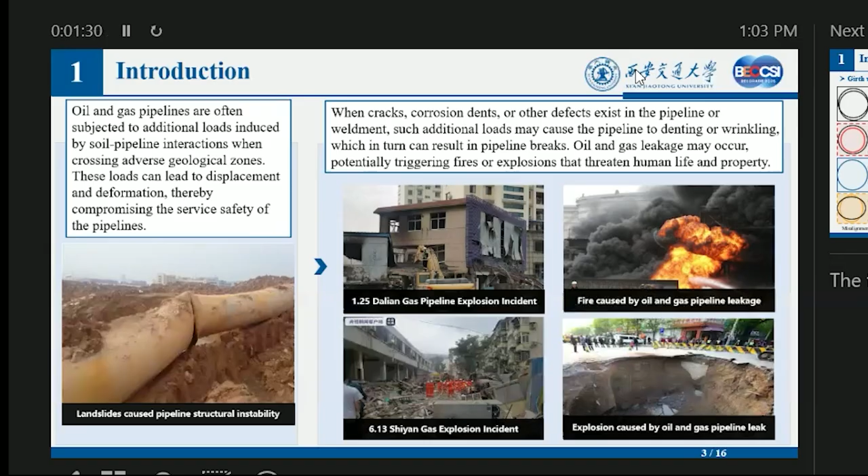Oil and gas pipelines are often subjected to additional loads induced by soil-pipeline interactions when crossing adverse geological zones. This load can lead to displacement and deformation, thereby compromising the service safety of the pipelines. When cracks, corrosion, dents, or other defects exist in the pipeline or weldments, such additional load may cause the pipeline to denting or wrinkling, which in turn can result in pipeline breaks. Oil and gas leakage may occur, potentially triggering fires or explosions that threaten human life and property.

Girth welding is a common technique used for joining pipeline segments. However, various misalignment types often occur at the girth weldment, such as offset misalignment, unequal diameter misalignment, unequal thickness misalignment, and ovality misalignment. These imperfections make the girth weld become a weak region, where fracture or buckling is more likely to initiate.

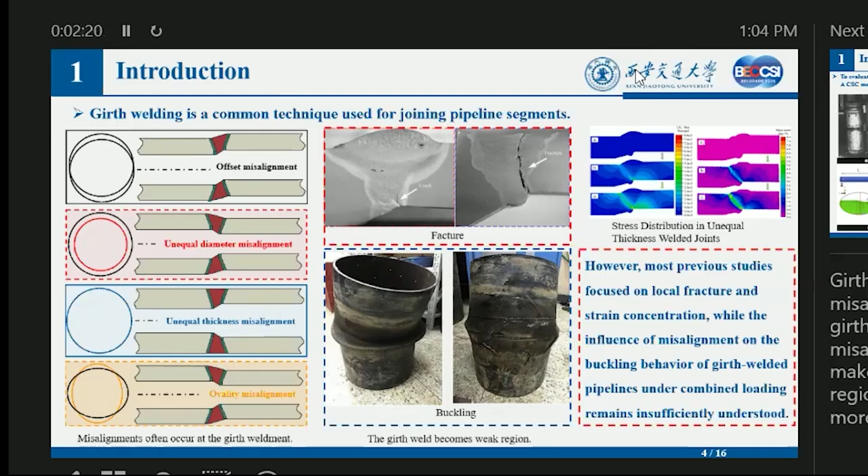However, most previous studies focused on local fracture and strain concentration, while the influence of misalignment on the buckling behavior of girth-welded pipelines under combined loading remains insufficiently understood. To evaluate buckling behavior of pipelines, researchers have conducted a series of experimental and numerical studies. A CSC model is proposed to account for the effects of geometric features, loading conditions, and material properties. Existing CSC models include CSA, DNV, the Dorey model, and the CRES model.

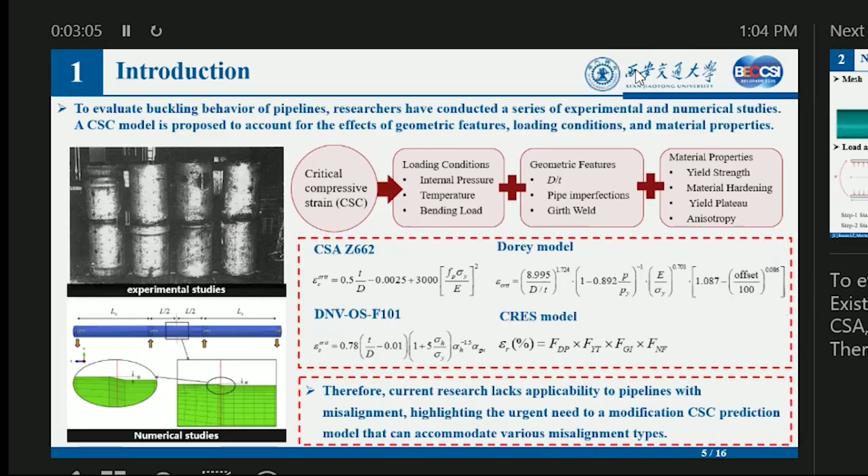Therefore, current research lacks applicability to pipelines with misalignment, highlighting the urgent need for a modified CSC prediction model that can accommodate various misalignment types. The second part is numerical modeling.

Shell elements are employed to model the pipeline, and a fine mesh is used at the weld location. Four misalignment types are considered. Type 1, offset misalignment. Type 2, unequal diameter misalignment. Type 3, unequal thickness misalignment. And type 4, ovality misalignment. For the loading and boundary conditions, a two-step procedure is adopted. Internal pressure is the first step, followed by bending loads at both ends of the pipeline.

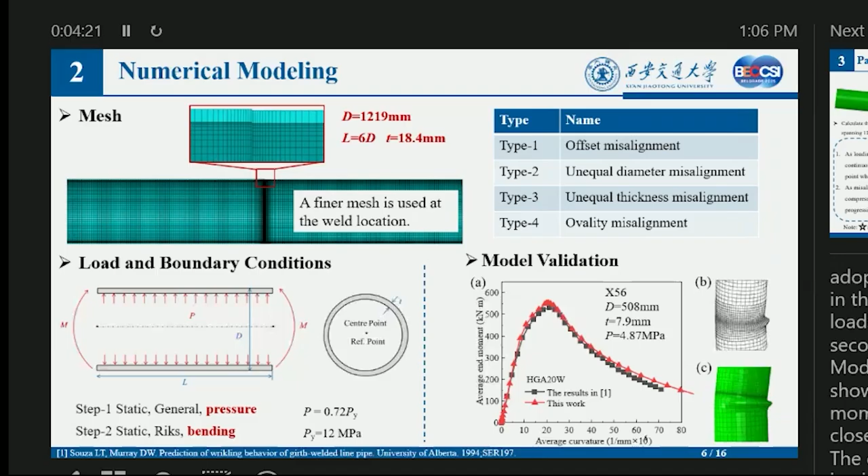The model validation is then performed, showing that the simulated bending moment and average curvature relationship closely matched the work of Souza. The deformation patterns and the buckling location are also in good agreement, confirming the accuracy of the mesh and the loading conditions used in the numerical models.

The third section is the parametric studies. In this section, we investigate the effects of misalignment type, amplitude, and angle on buckling behavior of pipelines. The figure on the left shows a diagram of the deformed shape. We calculate the compressive strain using the pipeline spanning one diameter of the girth weld region. The resulting compressive strain and average curvature curve is shown in the figure on the right.

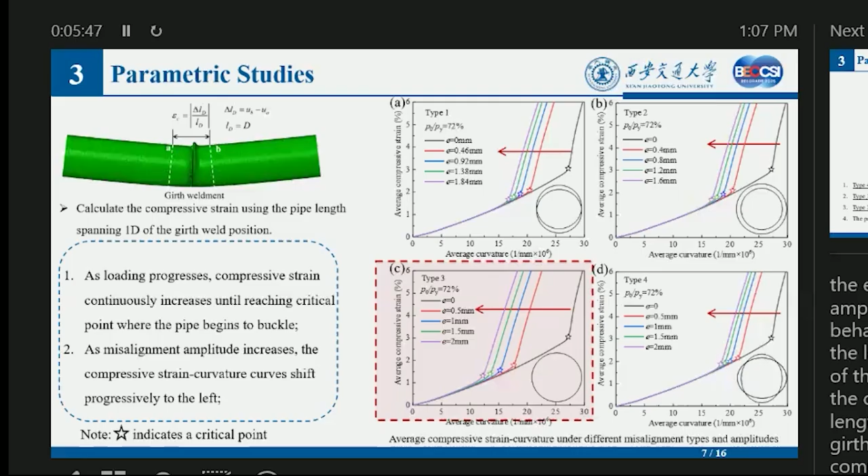As shown in the figure, as loading proceeds, compressive strain continuously increases until reaching the critical point where the pipe begins to buckle. As misalignment amplitude increases, the compressive strain and curvature curves shift progressively to the left. The marked point in the figure indicates a critical point. The horizontal and vertical coordinates represent the critical bending curvature and the critical compressive strain.

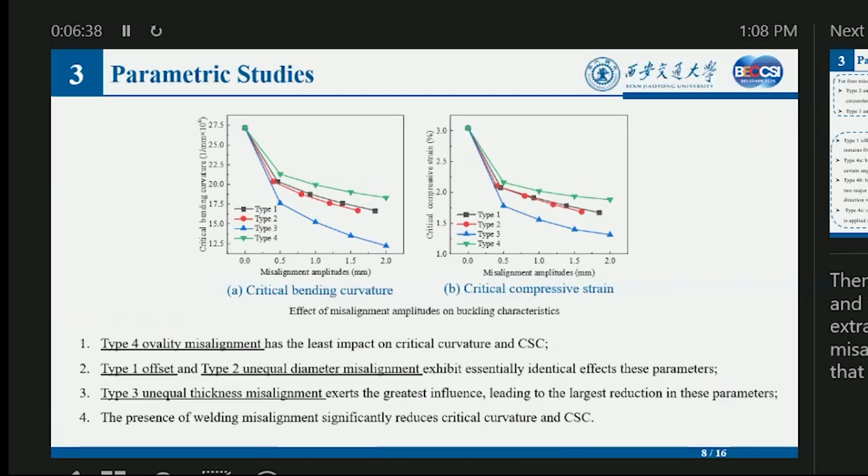Then the critical bending curvature and the corresponding CSC are extracted to examine the effect of misalignment types. It can be observed that type 4 ovality misalignment has the least impact on critical curvature and CSC. Type 1 offset and type 2 unequal diameter misalignment exhibit essentially identical effects on these parameters. Type 3 unequal thickness misalignment exerts the greatest influence, leading to the greatest reduction in these parameters. The presence of welding misalignment significantly reduces critical curvature and CSC.

For the four misalignment types described above, type 2 and type 3 are uniform around the circumference. Type 1 and type 4 are non-uniform. Then it is necessary to consider the effect of misalignment angle. As shown in the figure on the right, for type 1 offset misalignment, when the loading direction remains fixed, the pipe can shift in different directions.

For type 4 ovality misalignment, three conditions can be considered. In type 4A, both pipe segments exhibit ovality, and a certain angle change occurs between the major axes. In type 4B, both pipe segments exhibit ovality, and the major axes are maintained at 90 degrees, while the loading direction varies. In type 4C, one pipe segment exhibits ovality, but loading is applied in different directions.

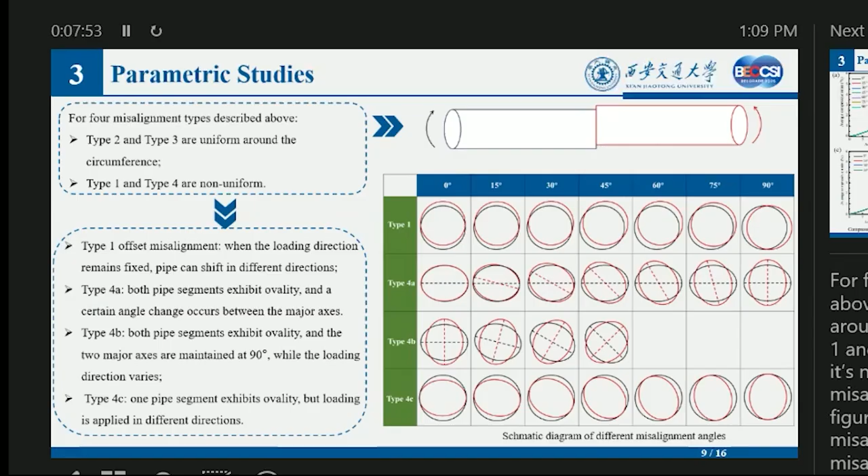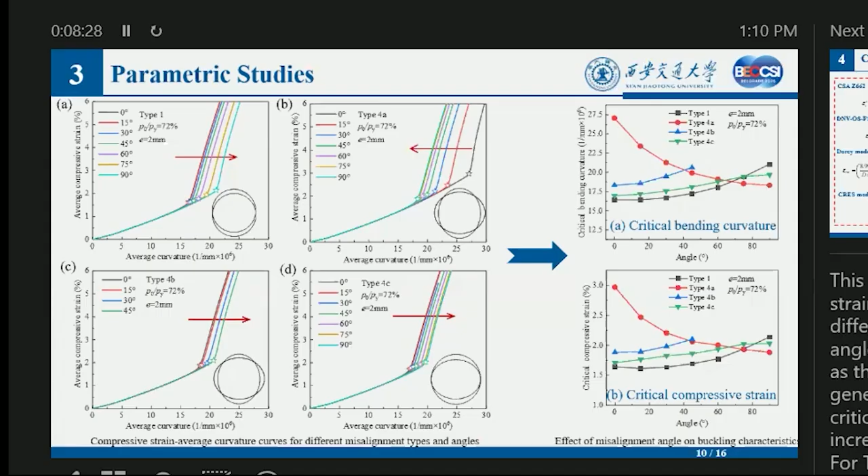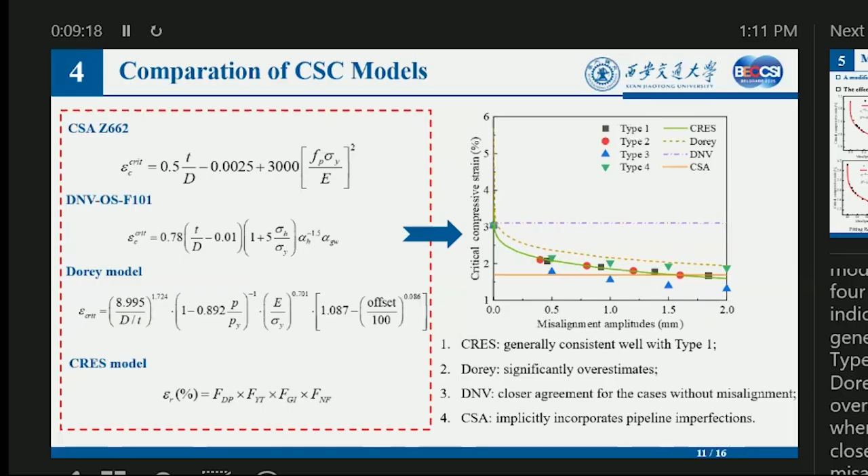The fourth part presents a comparison of critical strain capacity models. We compared the four prediction models with our simulation for four misalignment types. The results indicated that the CRES model is generally consistent with type 1, and the Dorey model significantly overestimates the numerical results, whereas the DNV model is in close agreement for the cases without misalignment. And the CSA model is lower than the numerical results because it implicitly incorporates pipeline imperfections.

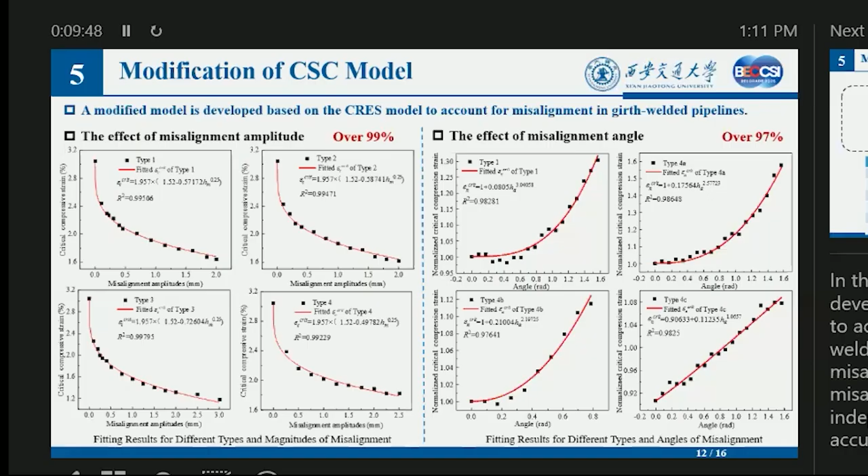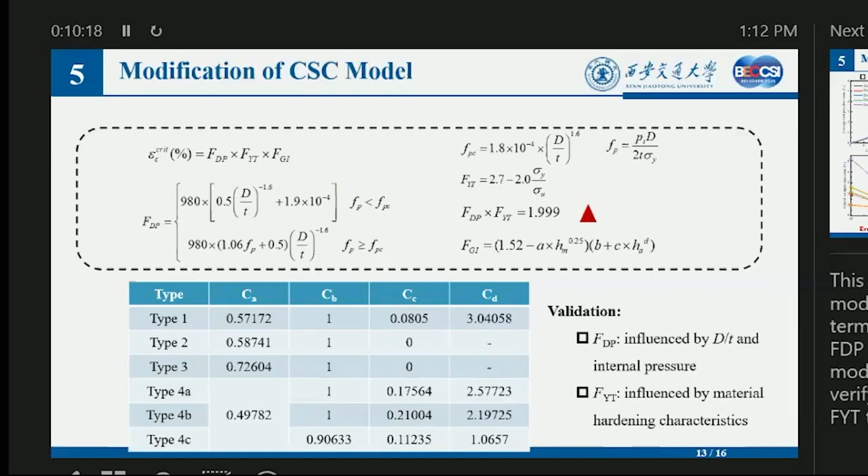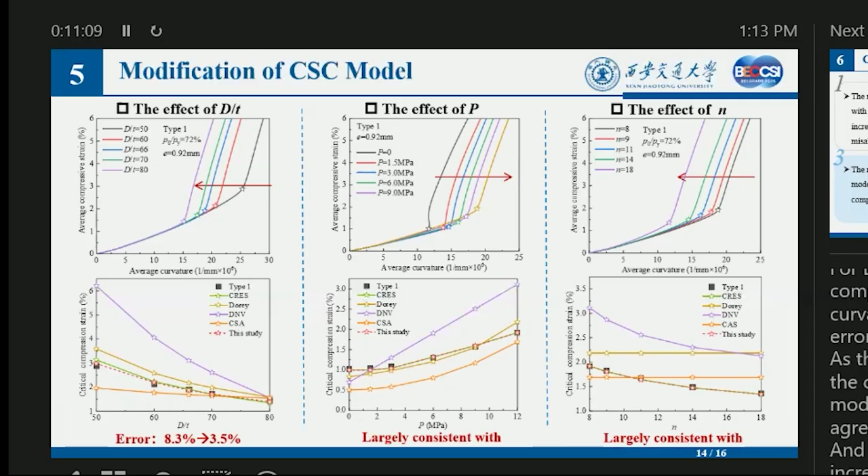So this slide shows the validation results. For diameter to thickness, as D/t increases, the compressive strain and average curvature curve shifts to the left. The error decreases from 8.3% to 3.5%. As the internal pressure increases, the curve shifts to the right. The modified model remains in close agreement with the numerical results. And as hardening exponent increases, the curve shifts to the left, and the consistency between the predictions and the numerical results remains excellent.

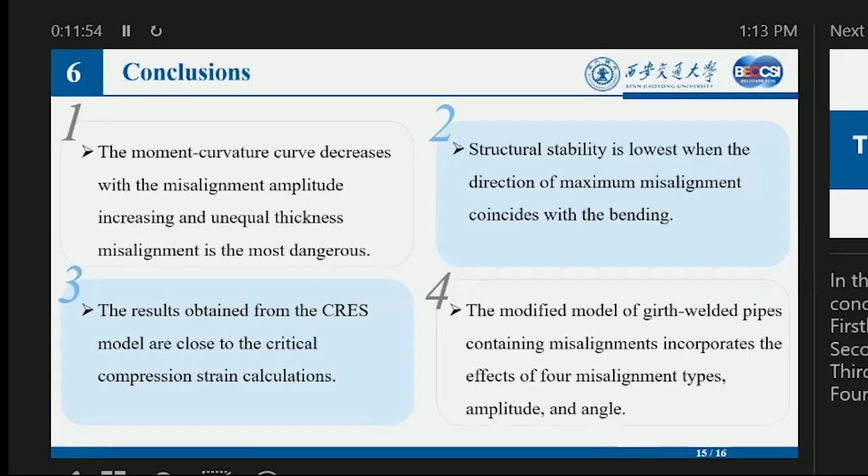In the final section, the main conclusions. Firstly, the moment and curvature curve decreases with increasing misalignment amplitude, and unequal thickness misalignment is the most dangerous. Secondly, structural stability is lowest when the direction of maximum misalignment coincides with the bending. Thirdly, the results obtained from the CRES model are close to the critical compressive strain calculations. Fourthly, the modified model of girth-welded pipes containing misalignments incorporates the effects of four misalignment types, amplitude, and angle.